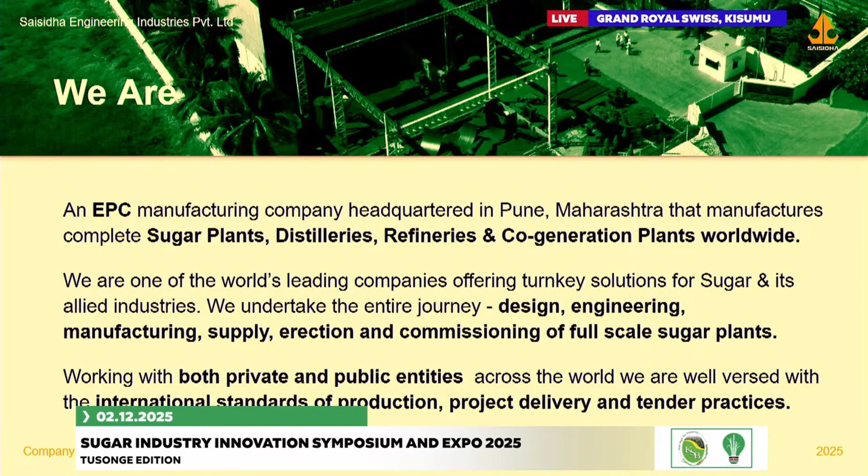Saisidha Engineering is an EPC company that normally undertakes complete sugar plants, high pressure cogeneration plants, and distilleries - both molasses based and grain based. We work with both cooperative and private sectors, taking on complete design, in-house engineering, supply, delivery, and complete turnkey projects for African industries, African countries, Latin American countries, and in India as well.

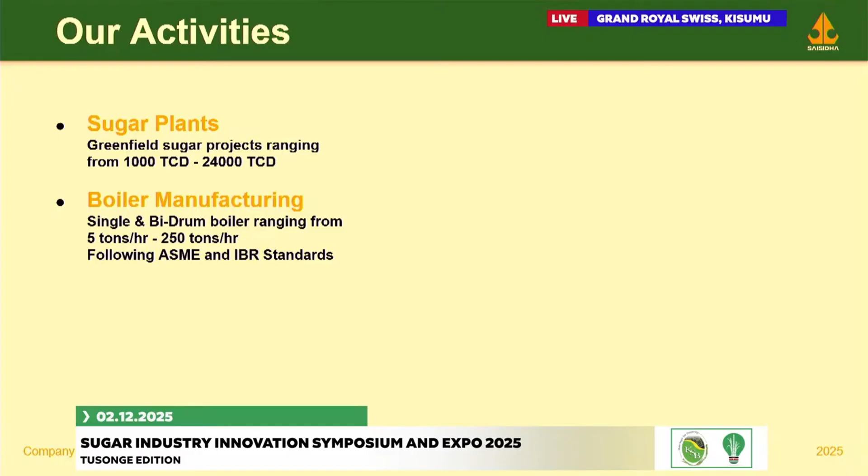We do sugar plants ranging from 1000 TCD to 24,000 TCD. High pressure boiler manufacturing we do up to 250 tons as per ASME and IBR standards. For cogeneration plants, we provide complete solutions using high pressure steam technologies for sugar mills, including back pressure and condensing turbines.

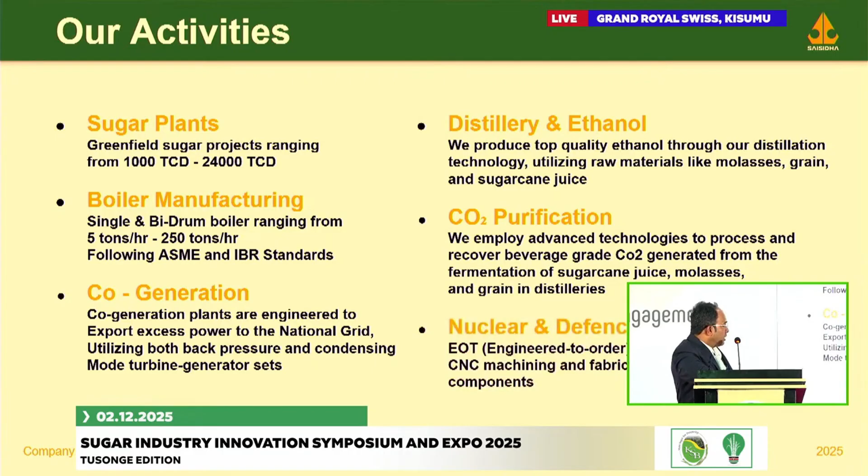For distillery plants, we produce high quality ethanol using advanced technology, from both molasses and grain commodities. The CO2 generated from the ethanol plant can be purified and supplied to Coca-Cola industries - we can deliver that plant as well. We also provide specialized equipment for some nuclear and defense industries.

What is Saisidha in numbers? Saisidha has 3 state-of-the-art manufacturing facilities, and over 100 qualified engineers appointed at our engineering and manufacturing levels.

We completed our project in Africa within 15 months, starting from design all the way to commissioning, including shipment from India. We have been recognized as a 2-star export house because we continuously ship materials - over 1000 pieces of equipment supplied globally.

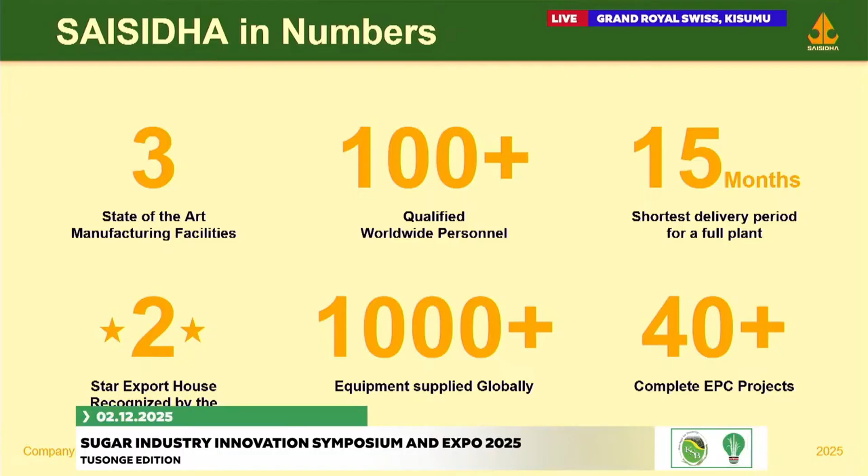In total, over the last 40 years, we have completed 40 EPC projects, out of which over 20 are in African countries.

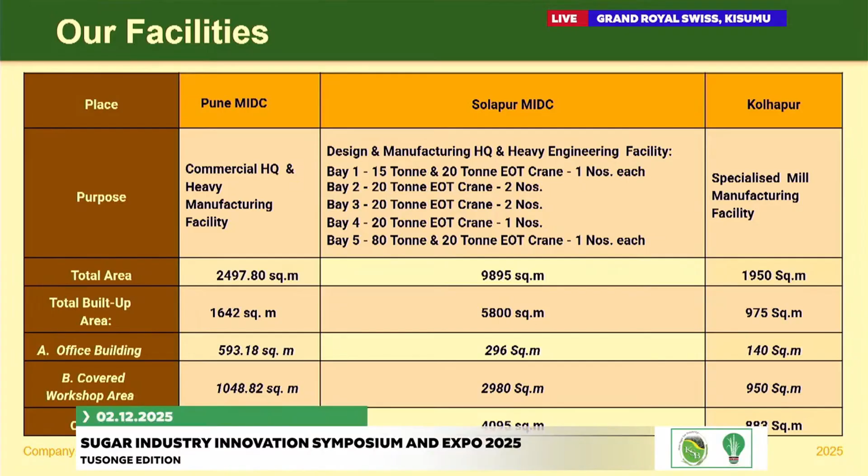These are the three workshops we have. One is in Pune MIDC, where we manufacture stainless steel materials and assembly units. Solapur MIDC handles manufacturing of all processes, equipment, and structures needed for sugar mills. All three facilities are in Maharashtra, India. In the Kolhapur region, we manufacture mills and mill-associated equipment. These are some photos of our workshops.

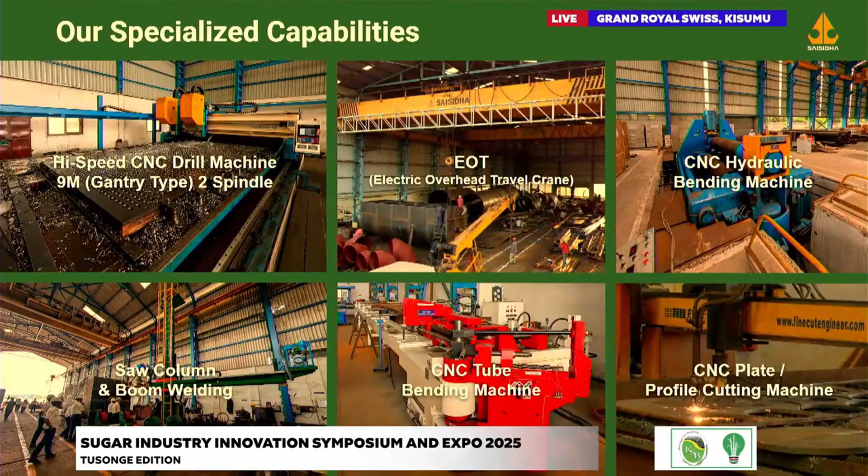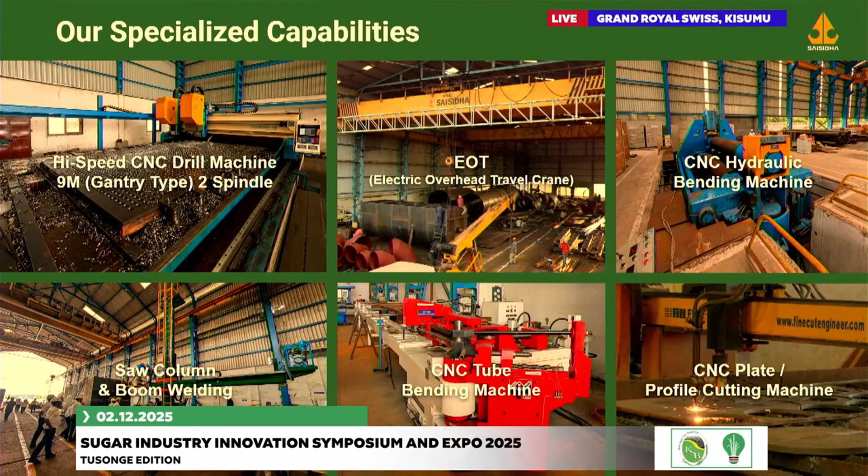We have facilities in Solapur, Pune, and Kolhapur. These are some of the equipments we have to manufacture sugar plant and processing equipment. We have high-speed CNC machines, various EOT cranes, CNC bending machines, saw machines, and cutting machines. All high-tech, automated, and CNC technology is used for manufacturing the equipment.

We have been certified and affiliated with IBR and ASME technologies. Normally, boilers we manufacture are based on IBR, and for overseas African countries we follow ASME as a standard. We have been recognized by the Exim Bank of India to do LOC, line of credit, projects, and we are affiliated with the Nuclear Power Corporation of India.

In Uganda, we have done almost 9 plants: Bugiri Sugars, GM Sugars, Hoima, Kamuli, Kidera, Kinyara, Kinyandago, Mayuge, and Modern Distillery. Almost 9 plants of various capacities we did in Uganda.

Rest of the world, as I told you, in Kenya we have done West Valley, Kericho, and Swite. West Valley was commissioned in August '23, and Swite we are going to commission - I think we have already commissioned the West Valley expansion. So these are all international projects we have done.

We have also been in Latin America, in Mexico, Belize, and Costa Rica - countries like that, we have supplied many equipments. Some domestic projects also we have done. This, including all, is 40 projects we have done altogether.

Now, a legacy of trust in Africa. Basically, African countries have a lot of trust in our company based on the quality of equipment supplied and the installation time we achieve - almost 15 to 18 months for a complete project. And the performance we have achieved is very remarkable. That's why the people of Africa trust Saisidha.

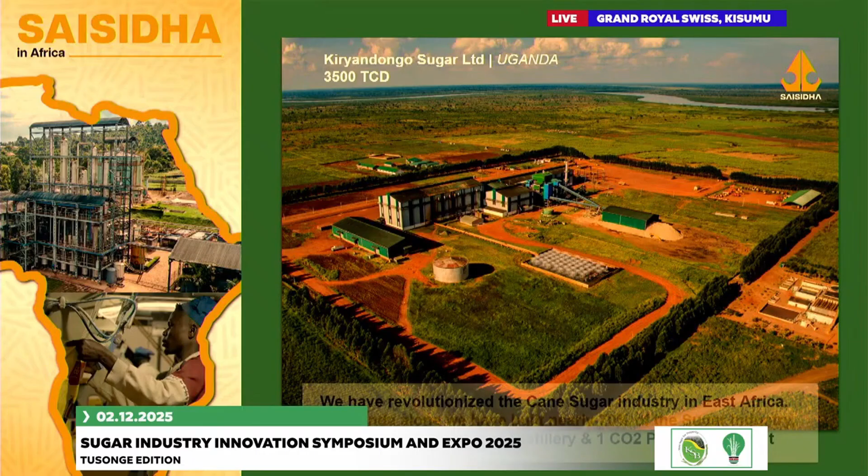This is another 1 billion dollar sugar project with 3,500 TCD. We have completed, as I told you, almost 70% of the sugar industry development in Uganda - 9 complete sugar plants, 1 distillery, and 1 CO2 purification plant, all on turnkey basis. We can say we have a lion's share in Uganda.

100 plus qualified engineers and 1,000 equipments supplied globally. We have been called a 2-star export house. Basically, Saisidha is contributing to food security in the African region, local employment and training, and foreign exchange reserves.

This is our main impact in African countries. Our ongoing projects - this West Valley you might be seeing - I'll go one by one through the capacities we have achieved and the standard results.

West Valley is a 1250 TCD plant, expandable to 2200 TCD. We commissioned this plant in August 2023. It was designed so well that within 1.5 years they expanded to 2200 TCD in the same plant, reducing steam consumption from 41% to 36%, and increasing capacity to 2200 TCD within the same boiler.

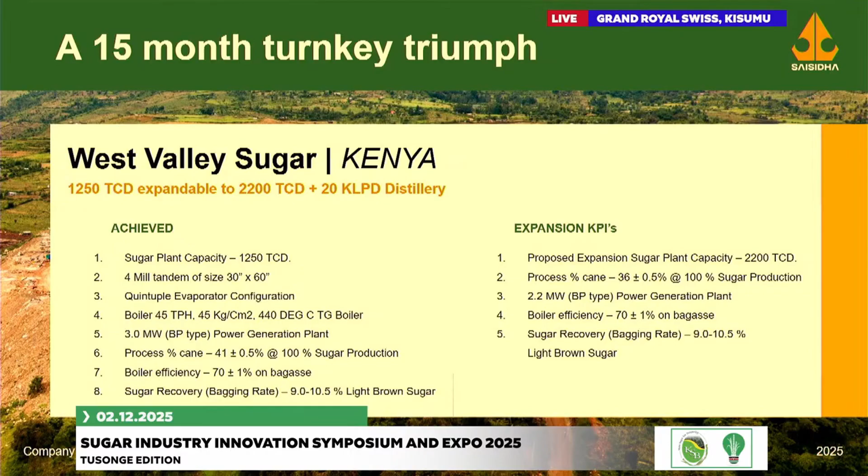Now, last month in December, we commissioned a 20 KLPD sugar ethanol plant for West Valley. This is the growth of West Valley, and Saisidha is completely involved in that - a molasses-based distillery plant producing very good quality ethanol and ENA, extra neutral alcohol.

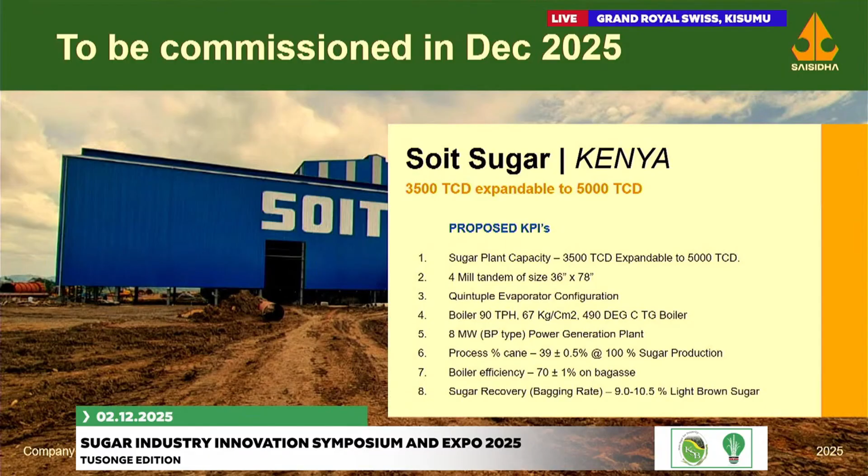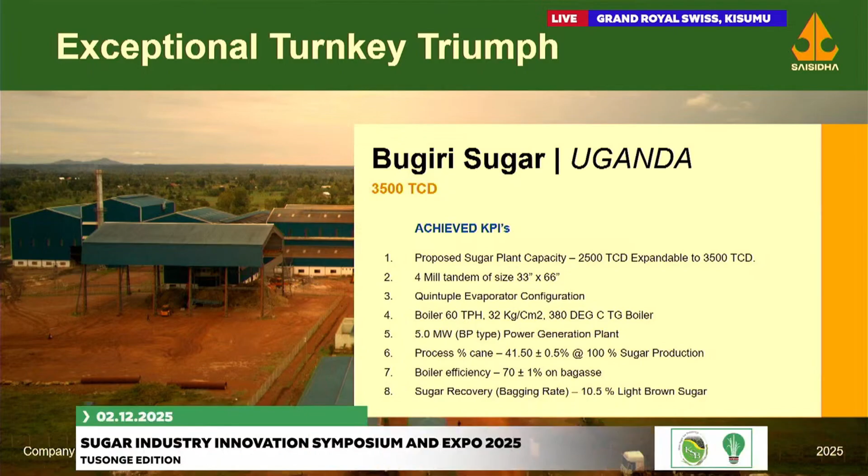And this is another one, the Bugiri plant in Uganda, which was commissioned during COVID time. This is a 2,500 TCD plant, expandable to 3,500 TCD, 4 mill tandem, quintuple evaporation. We are almost using falling film evaporators and latest technology like vertical continuous pans to reduce steam consumption, and high pressure technology boilers and turbines.

This is the Bugiri plant what we have installed.

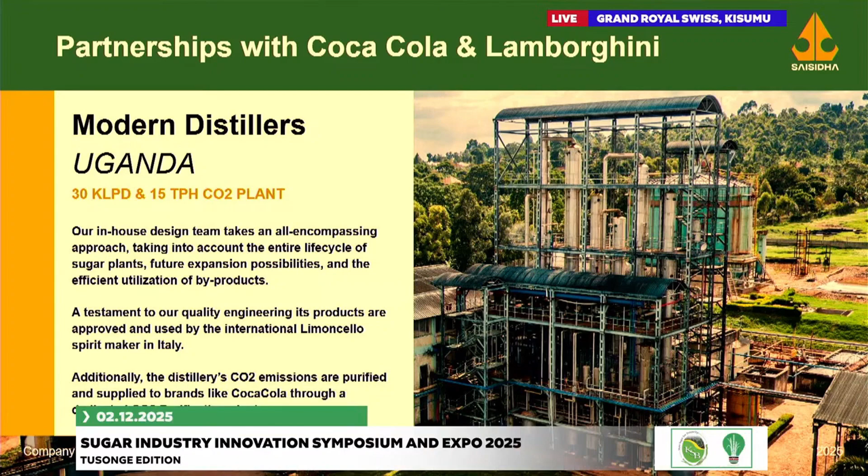We have given almost a 30 KLPD plant to Modern Distillers, where they are exporting ethanol and CO2 to Coca-Cola and Lamborghini. That quality we are producing ethanol. Modern Distillers, as I told you, 30 KLPD plant in Uganda. They are selling CO2 to Coca-Cola and ethanol to Lamborghini. Almost a 30 KLPD plant. This is how the plant looks.

Kidera Sugar is the highest capacity sugar plant we did, 6,500 TCD, expandable to 10,000 TCD, with a 120 ton boiler, the highest capacity boiler with 67 kg. Single drum boiler we have installed in Uganda.

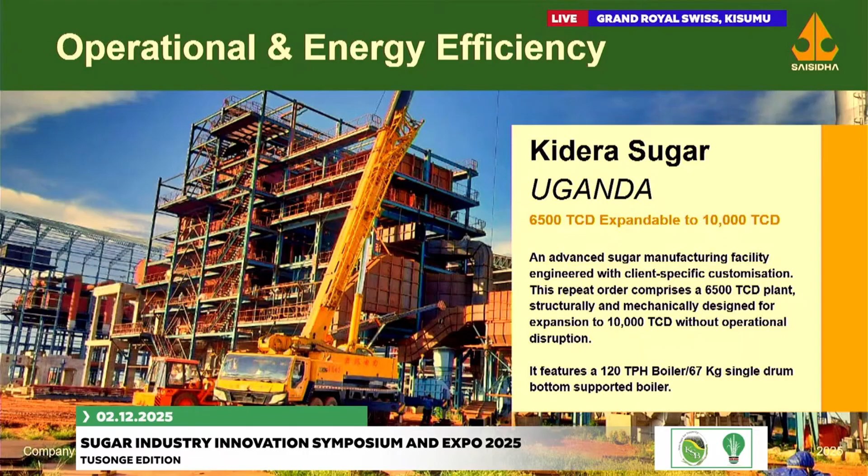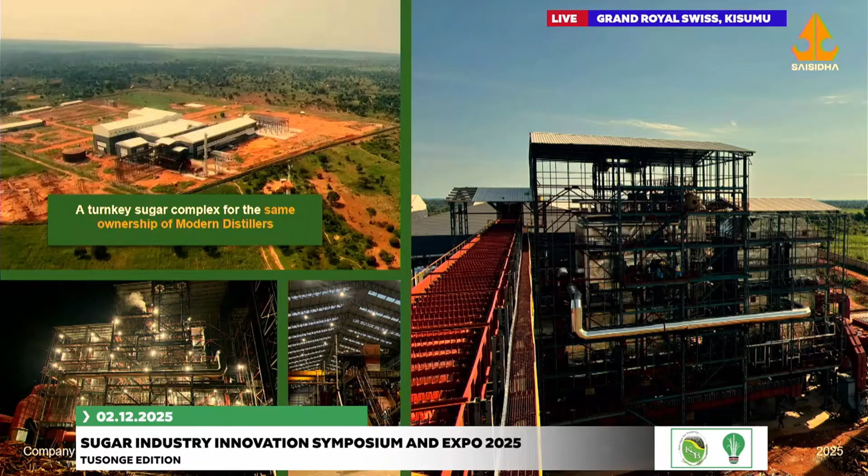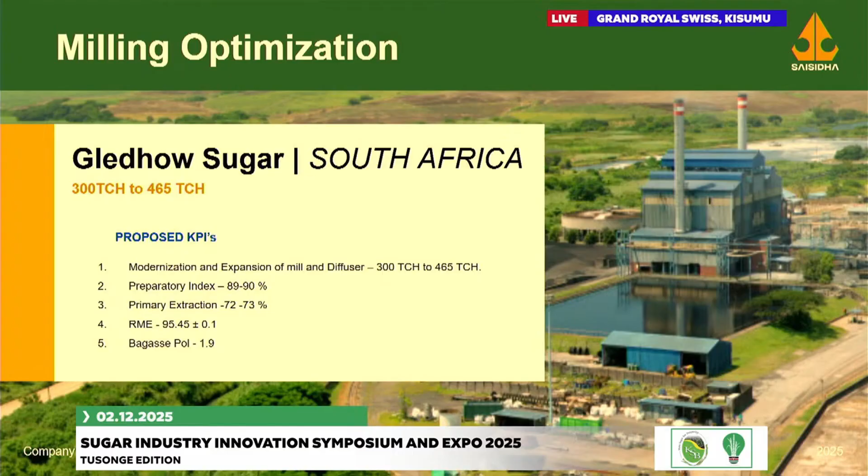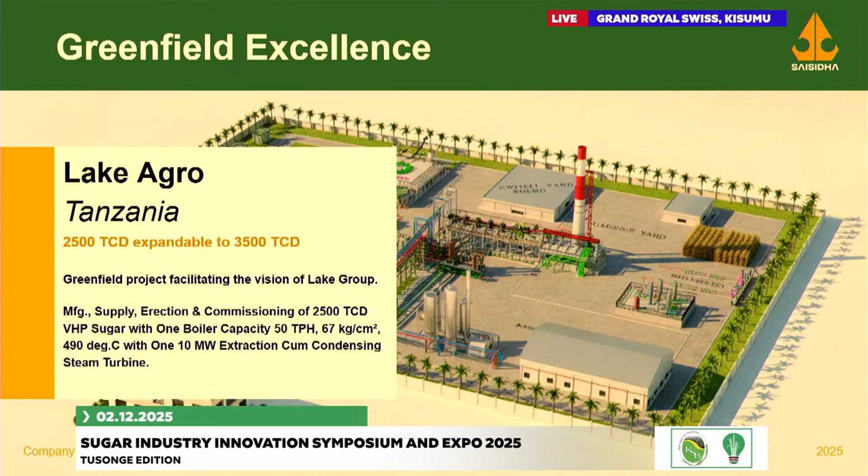This is another one, a greenfield plant recently awarded to us from Tanzania. In Tanzania, we are doing one complete greenfield plant, 2,500 TCD to 3,500 TCD, with a 50 ton boiler and almost a 10 megawatt cogeneration plant. This is a model project for us, completely from design up to commissioning, Saisidha is doing it, and this will be commissioned in the month of September or October 2026.

The Lake Agro group has ordered this, the Lake oil pump stations you might have seen in Tanzania, and oil, that group company is Lake Agro.

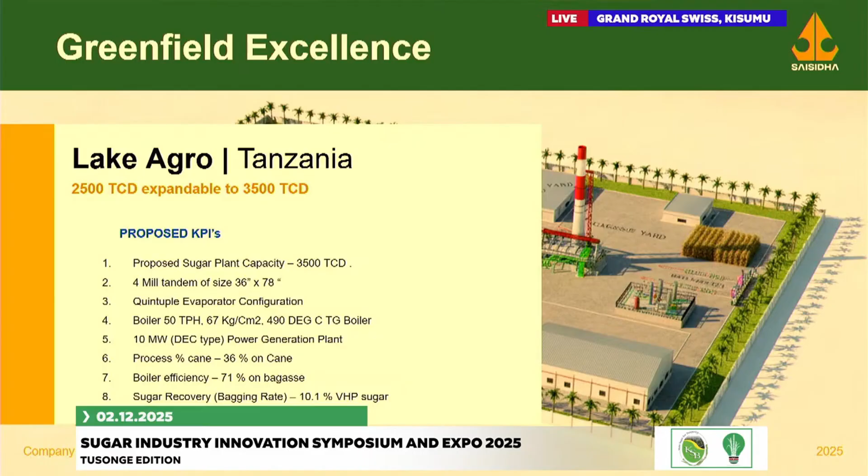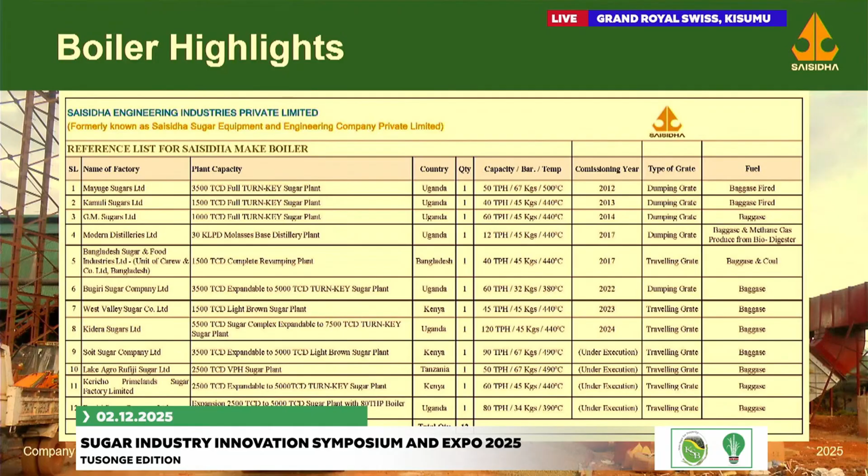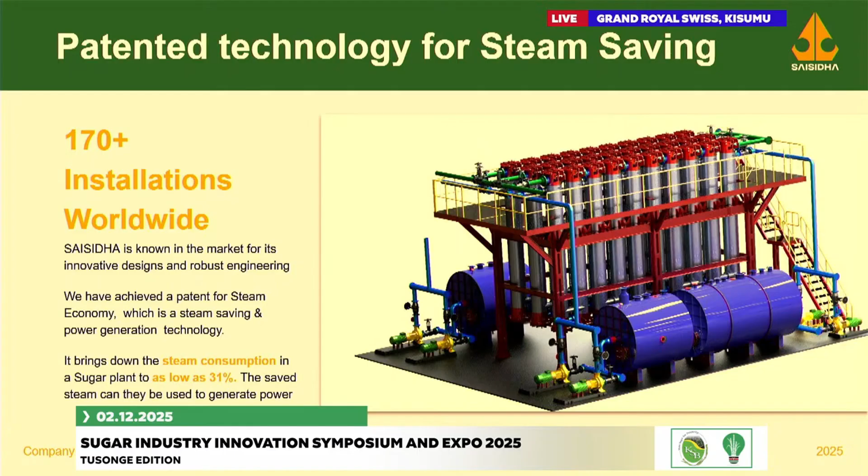Having known the journey of Saisidha in Africa, as I told you, it's been a remarkable journey, and the trust the African people, African governments, and His Excellency have given us is remarkable. The support we got from the African government and His Excellency is the foundation for us. Basically, from this foundation, we have grown and reached out from Kenya, Uganda, and Tanzania. Now we have even gone into Nigeria. So we have grown tremendously. All this trust began with Kenya.